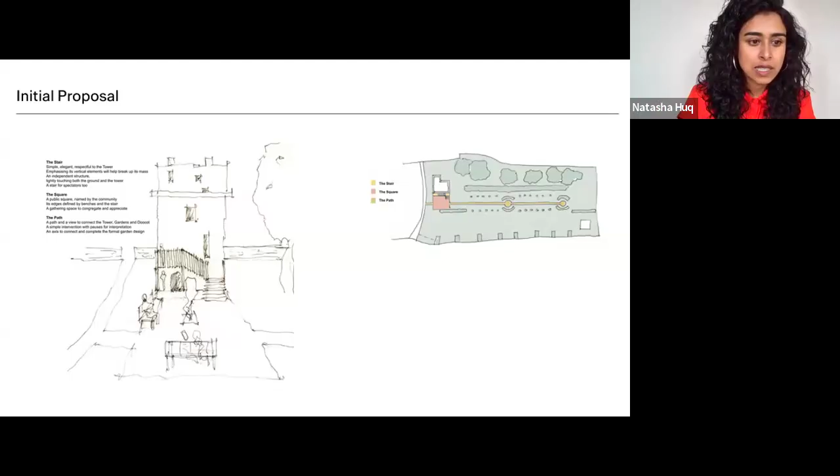And then as we rapidly progressed through the various stages of all the statutory consents and even the tender process, it was very clear that it was going to be impossible to deliver the project within those timeframes, for various factors. But the two main factors: first of all, after our ecological surveys, there was a suspected peregrine falcon, which is a Schedule 1 bird, and therefore it has the highest levels of protection.

And then number two was the scheduled monument consent, which I had not done before, and it was very complicated. It required a lot of consultation with Historic Environment Scotland. It was very tricky and time consuming, and it wasn't something that could be turned around very quickly.

So it became clear that we weren't going to meet those funding timescales, and so the solution was to phase the project. East Lothian Council managed to negotiate with their funders, and then between the design team and the client, we worked out a justified reasoning and a manageable program that split the project into two phases, so that the first phase would be complete and some of the money would be spent within the first deadline, and then we'd be able to push some of that extra money into the second phase and get some additional funding as well.

So, in essence, the first phase consisted of repairs to the doocot and boundary walls, new accessible paths, landscaping, and interpretation. But crucially, it also included sampling, surveying of the tower, upskilling of the contractor, and a lot more investigative work to the tower. And then the second phase was the repair and consolidation of the tower itself, its interpretation, and the installation of a new external stair to provide access to the first floor interior.

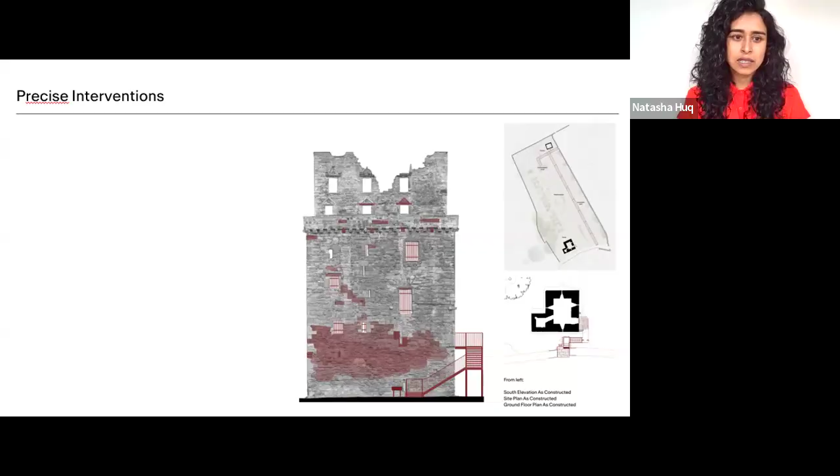And so it wasn't just the repairs for the immediate capital project. We could also identify particular stones that we knew may need repair in 5, 10 years time, so that could be recorded. And then it means that the client can plan for the future, and they know when they'll need to do another phase of the project or another round of repairs.

The other thing that it did was it helped us with the historic phasing, and that was really important for statutory consents, for technical reasons, and also for interpretation reasons. So an investment getting the cherry picker, but really useful because that happened in phase one while we were working on the doocot and so forth. We were able to plan for the next phase.

So yeah, that information gathering and then the communication of that information was super important. As I said, it allowed us to understand the phasing. So we were able to do these phased drawings. And then we also, so I'm just going to go back to the first slide. So this image that I took up with me and was able to sketch over was a high definition photogrammetry, which we did in-house. So I can even look at each stone.

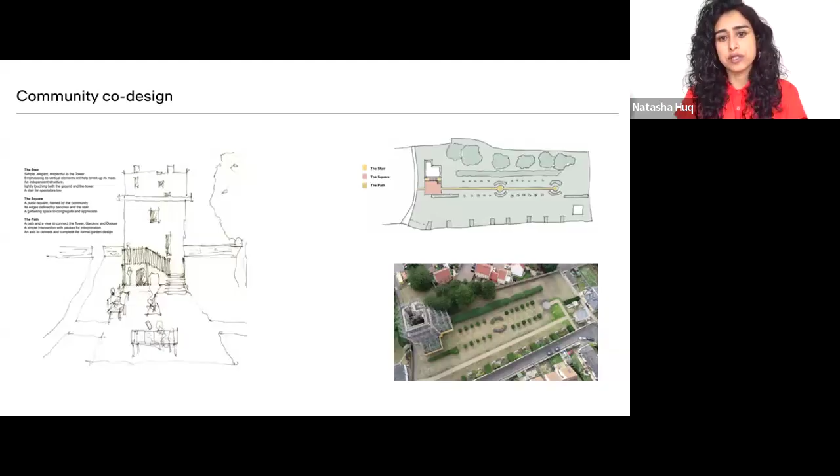And the long-term view, that engagement was also important to get people to feel ownership of the site, because the long-term view was that the community would take metaphorical ownership, but also run tours and manage the visitor experience, because at East Lothian Council there weren't the resources to do that. So that was a really important part of the project, the future of what happens after the capital project's finished.

So all of this, as I said, about the fortnightly design team and client meetings, it was all a process. It was all the end output of collaborative decision making. So we had East Lothian Council, we had archaeology, the archaeology department, planning and heritage department. We had quantity surveyor. We had the person who was gaining funding. And then we had the National Trust for Scotland, who were really engaged in the project. And that was really important for that kind of really practical conservation advice and future maintenance.

As I said, Community Council was very much involved in those fortnightly meetings and in wider discussions. The contractor, as I said, they were brought on board very early on, so they were very much instrumental in the repair techniques and generally smoothing out the on-site process, because there were issues of antisocial behaviour. And I might come onto that at the end if we've got time.

And then the design team, really, really collaborative design work and collaboration in a way that I hadn't done before. So it's not just with the structural engineer, but also with the quantity surveyor. We had to be really collaborative because the funding was so difficult and because we didn't really have defined, measured proposals, because it was all done so quickly. We had a set amount of money, but we had a lot of provisional sums, so we had to just target it where it was needed and work with the contractor so that everything was kind of above board in terms of the contract.

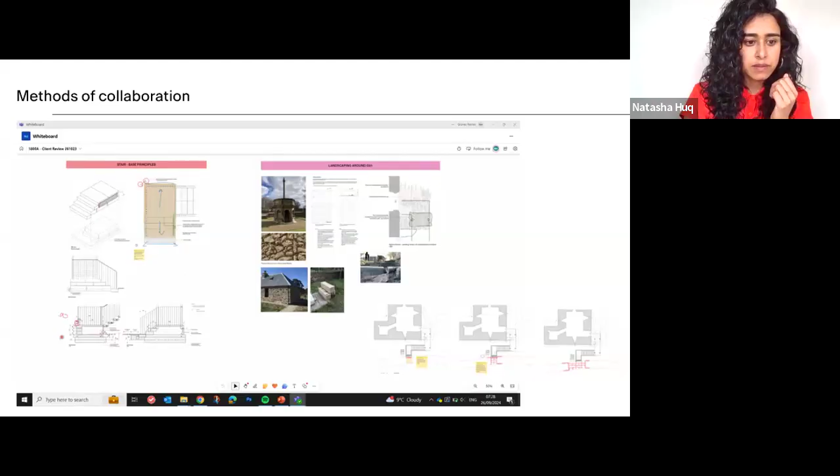And then going on to contractor collaboration and site collaboration. We used a local contractor, Campbell and Smith, and luckily the site foreman and stonemason was a local in Prestonpans, Robert. They did a lot of the stonework, and we wanted to make sure that the regular repair and the stonework repairs were in their hands, so that they could come back and do those regular maintenance procedures. So we had to match the appropriate skills to specific areas.

So Robert carried out a lot of the repairs and the new stonework, but then there was specialist decorative stonework, where we needed a specialist stone repair contractor, Graciela Ainsworth. So it was also about managing how they all work together. And then there was Scottish Lime Centre Trust, who upskilled the local contractor in hot mixed lime mortar techniques. And so all of this was managing their teamwork, but also managing who did what, and really thinking about the future maintenance of the project.

So, for example, we wanted all of the high level corbels to be repaired because they were all delaminating, because they were installed with the beds vertically. So they were all delaminating, and obviously access would have been very difficult in the future because you need a high scaffold. So we made sure that those were repaired very carefully, whereas the low level repairs could be done on a more cyclical basis.

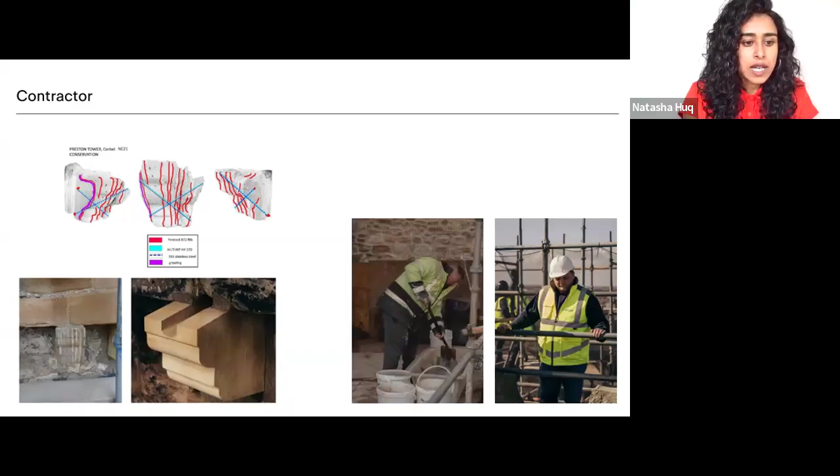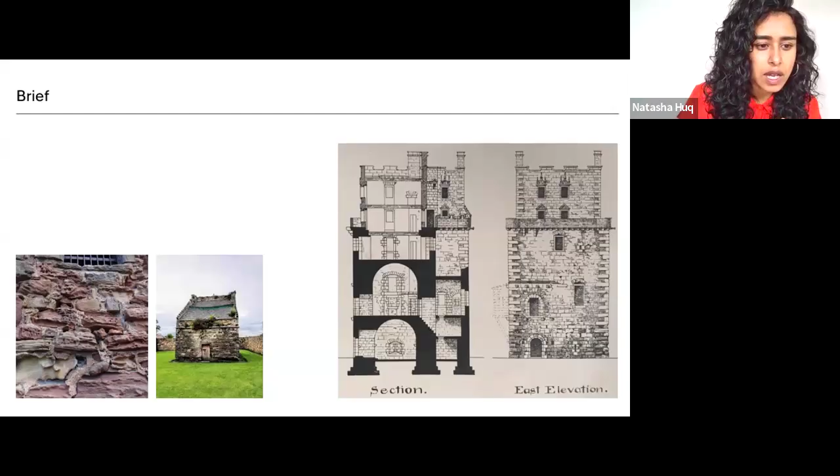One of the particularly tricky parts of the repair was the south elevation. I'll just quickly go back to this left-hand picture, really, really highly deteriorated. I've never seen such deterioration actually. Tantallon Castle has similar. For various reasons: because of the coastal location, salt-laden wind whipping around that southwest corner, the stone getting wet and then drying out again very quickly because of the south elevation. So lots of different reasons.

And then also because that lower part of the south elevation was easily accessed, there were well-minded but inappropriate repairs carried out. When we first did the investigation work in that south elevation, the mortar had shells in it.

So at first glance we thought, oh, this is kind of lime mortar repairs. But then as we dug in, it was very, very hard cement mortar, which all had to be taken out. And when it was all taken out, that lower part of the tower looked like it was about to fall down. It was terrible because some of the stone was sticking out, but some of it had completely deteriorated.

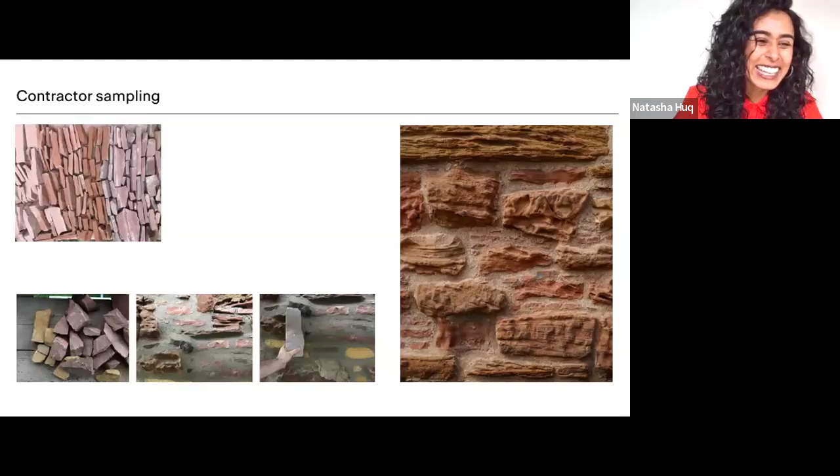And no one could really decide what the approach was. So we laid out different conservation approaches, and we drew them out so that we could all agree on an approach. And this was an interesting one. And again, for anyone who's interested, I can talk loads more about this, but very quickly,

And it's very different from the conservation approach that we took to the rest of the tower, which was light touch, only do as much as you need, make it very legible. This was an active restoration. And it was very much pushed by the community, but I think it was absolutely the right decision, because after an intense period of neglect and lack of maintenance, this Acrow prop almost represented that neglect. And so it was almost like an act of respect to restore this fireplace.

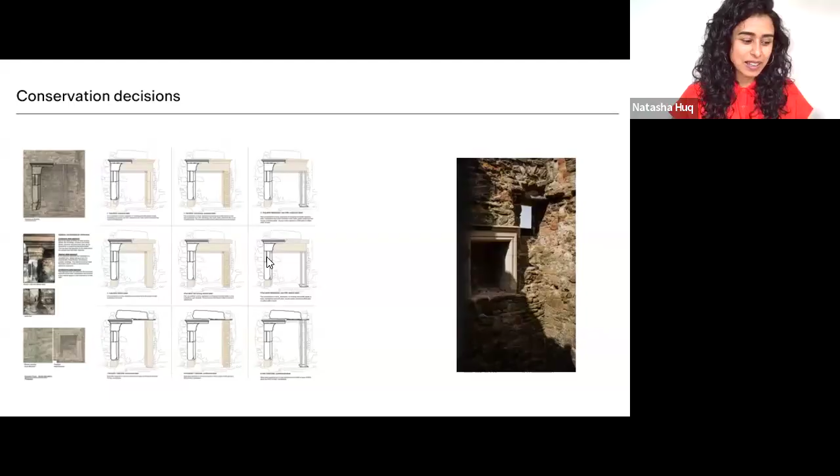The other thing, how am I doing for time? Oh, okay, I'll need to whip through.

The stair was a really interesting, tricky design process as well. So many factors to consider because of the archaeology. So one of the first consents was to do archaeological investigations. So we dug around the tower. There were some remnants of Victorian paths, of other structures that had been built there. So we knew where those were, and obviously we could not penetrate those. It was also the conservation approach. Do you copy an old stair? Do you do a really new one? What design approach do you take? There's also the thing about robustness and antisocial behavior.

So as I said before, it was meant to be a timber stair at the start, but we had to make sure that it was metal because as the design process was going on, there were lots of incidents of arson in the area. But we also wanted to add this sense of tactility and softness. So we had timber treads on a metal structure with a timber handrail, just to add that softness, where your feet touch and where your hand touches, there's the softness. And then accessibility as well.

We did have the discussion about should we put a lift in, and obviously that was completely not viable. But we did increase the width of the stair. At the start, it was a meter. We made it 2 meters so that if there was somebody that needed to go up the stair that perhaps required a helper, there was enough width for that helper to assist them. And then to counterpoint that, we had access into the ground floor. We put in a walkway so that there was, not wheelchair accessible, although there have been wheelchairs there, but a more accessible experience of the tower on that ground floor. So lots of factors to consider.

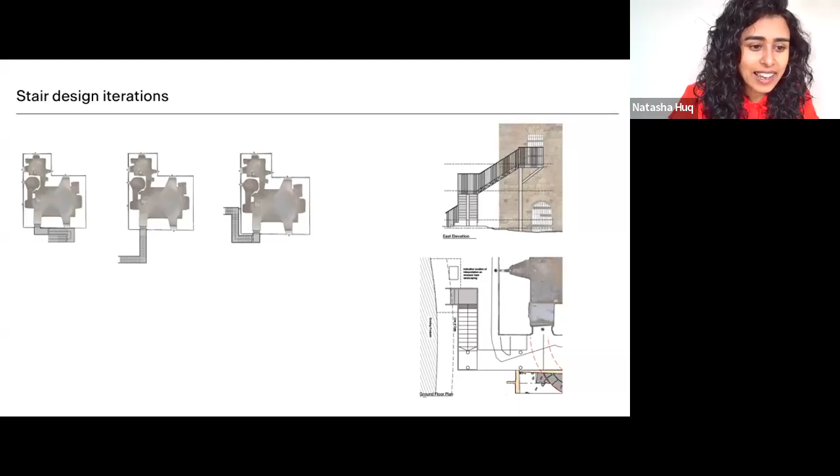Okay, I see. Yes, the other way that the stair was. Oh, I'm losing. Sorry, I don't know what's happened to the screen. Don't know if you can all still see that.

Hopefully you can. Yes, so design iteration for the stair. Originally, we had a bespoke stair contractor that was going to detail design and manufacture the stair, and they were really highly qualified craftspeople, but it just didn't feel right because it needed to be more collaborative. So we ended up working with a local blacksmith, Andrew Turner blacksmith, our stonemason, and also Leslie from our structural engineer, who is absolutely amazing, very patient. So we drew from everyone's expertise.

We did these whiteboard workshops, but also we ended up going to the blacksmith's workshop and actually building bits of it one-to-one, getting bits of metal and literally just putting them together like a kind of Lego model, just to really understand how these things would go together because there were so many factors that we had to consider.

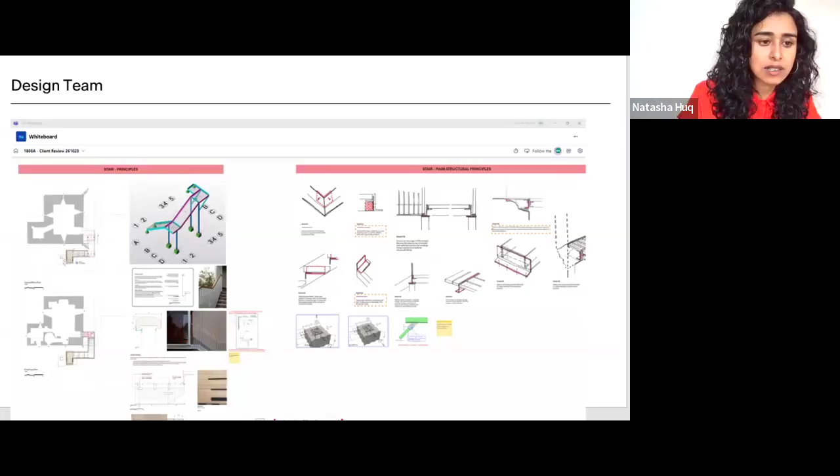So, yeah, just coming on to the final project. The paths sit comfortably within the site. They feel like they've always been there. They help provide this journey that's more accessible physically and emotionally. The tower has been repaired. The repairs are legible, but don't change the overall character of the tower. And the stair provides a completely new relationship with the tower, both internally and externally.

And I will say that these photos were taken straight after the interventions were done. So it has changed since then. The stone has gone a bit green, but that's to be expected. But that sense of care and craftsmanship can hopefully be seen throughout all the interventions.

And after that, all the open days that have happened, they've been booked out. There's a real appetite to get inside and learn about the tower's history. The feedback has been really great. There's a sense that this project is just the start of something. It's unlocked potential and provided new hope for the community. It's something for the community that's just been done for them.

The Friends group, the Friends of Preston Tower, that's properly constituted, and they're really taking on board and doing lots of events. Just kind of really lovely things. They're doing tours, but there's also this lovely engagement activity where lots of people are crocheting woolen pigeons. And so the idea is that each nest box, there's kind of 200 nest boxes, is going to be filled with woolen pigeons in due course.